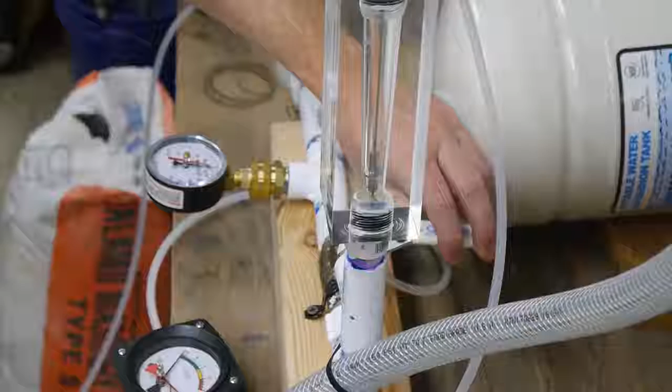You might even call this video a treat especial because it's the story of what may be one of the most inept YouTube collaborations of all time, thanks to me. It all started with a sketch of a venturi. A venturi is a device that constricts the flow of fluid to take advantage of Bernoulli's principle.

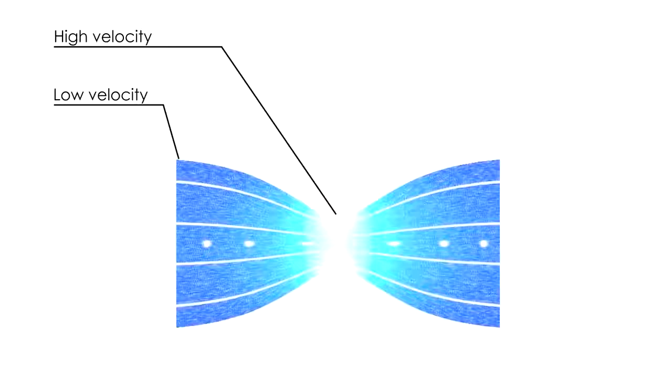You may have heard of this principle, which basically says that all energy in a fluid can take one of three forms: kinetic, potential, or internal energy. And the total amount of energy is the same along a streamline. So if you change one, for example, if you increase the kinetic energy of a fluid by speeding it up, you have to accommodate. In this example, the fluid's pressure goes down.

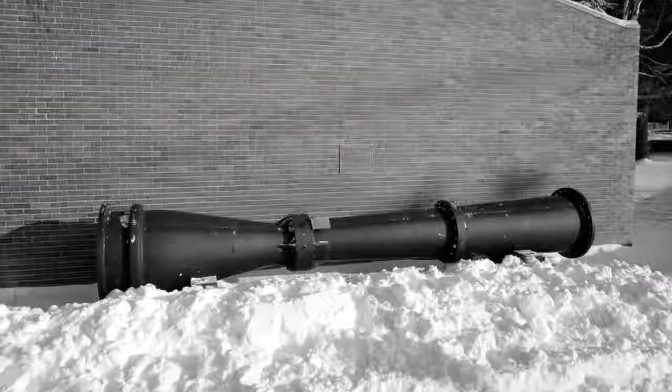Being able to lower the pressure of a fluid or create a vacuum just by constricting the flow area makes a venturi a very useful tool that can be found in all kinds of devices, from engines to trombones to scuba diving regulators. So I thought I'd like to have one of these venturis, and I know just the guy to make it for me.

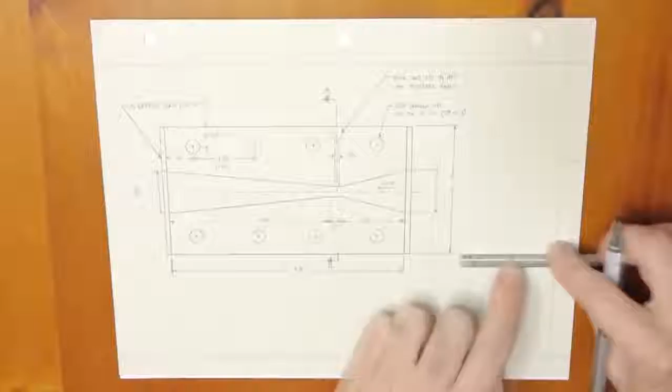You may have heard of his YouTube channel, Arduino vs. Evil, now cryptically shortened just to AvE. We've never seen his face, but we're pretty sure he's handsome. Him and I had been emailing ideas across the US-Canadian border, and this seemed perfect. I have a channel centered around practical demonstrations of engineering principles. He has a clapped-out Bridgeport milling machine. It was a match made in YouTube heaven.

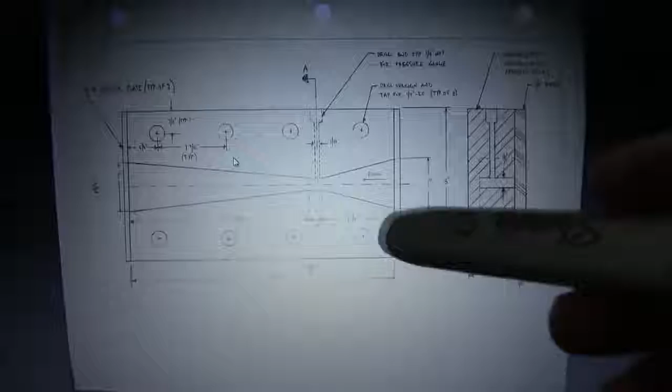So I sent the sketch over to AvE and said, "Could you make something like this?" And he said, "The drawings are never right. There's details left off. The guy doesn't know from his elbow, or whether it's drill pressed, punched or bored." But he tried to make it anyway, providing us with many excellent lessons about manual machining. Just busted out. So there's three ways to do this: the dirty way, the hard way.

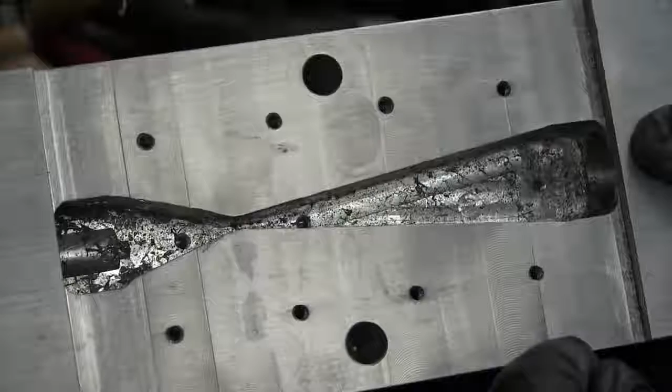And in a second video, the prototype was finished, and we were left with these parting words. If I were a betting man, and I am, I'd bet that this ain't gonna work. And it didn't. Or at least, I have to assume it didn't, because 10 months later, I got this in the mail. Instead of giving me the hard truth that my sketch was poorly considered and I wasted his weekend, he gave me something even better.

A care package including a clear acrylic liquid flow meter that was designed by someone who knew what they were doing. And if you look closely at this flow meter, you might recognize the shape as a venturi, which is perfect because I need a venturi to show you this fluid phenomenon.

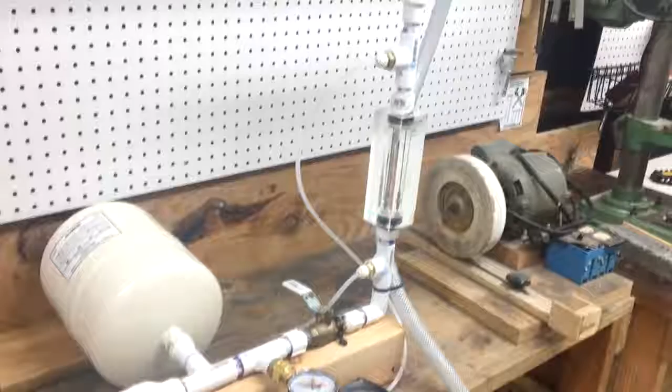Here's my setup. I have my garden hose running into the garage and a pressure boost pump feeding a manifold that connects to a pressure tank, a pressure gauge, and this flow meter. I modified the meter so it acts like a venturi by gluing the weight to the center post so it can't slide up and down.

And I have a differential pressure gauge to measure the pressure drop across the venturi. The drop in pressure is the whole purpose of this demonstration. To understand why, we need to look at the phase diagram of water. We know that water changes state based on temperature.

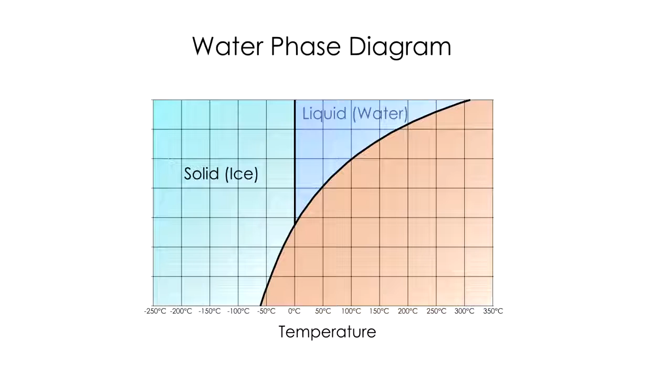It's a solid when it's cold, aka ice, a liquid at room temperature, and a gas when it's hot, aka steam. But the phase of any substance also depends on the ambient pressure. You can see that even at room temperature, water can turn to steam at very low pressures. This is true for a lot of substances.

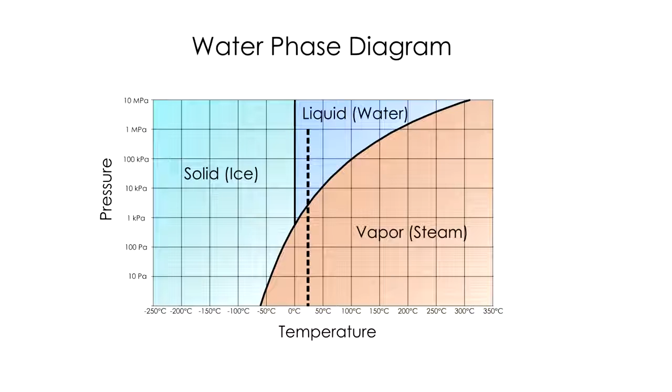If I force this water through a small enough opening in the venturi, according to Bernoulli, I'm decreasing the pressure and converting it to kinetic energy. And if I get the flow going extremely fast, I can decrease the pressure below the vapor pressure of the water, converting it to steam.

Steam on its own isn't that big of a problem, but the issue comes on the other side of the venturi, when the pressure goes back up above the vapor pressure and the steam collapses back into water. On a larger scale, this collapse can lead to steam hammer. Check out my video on steam hammer to learn more.

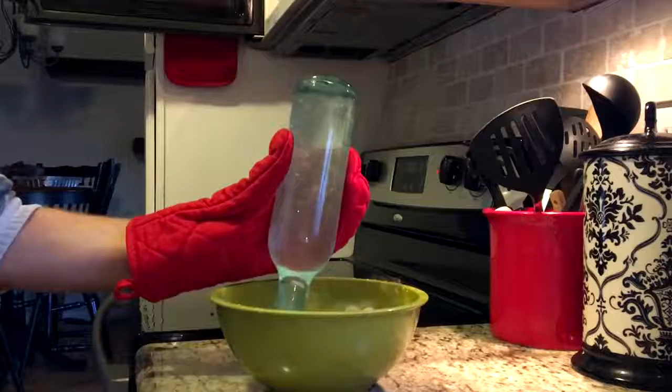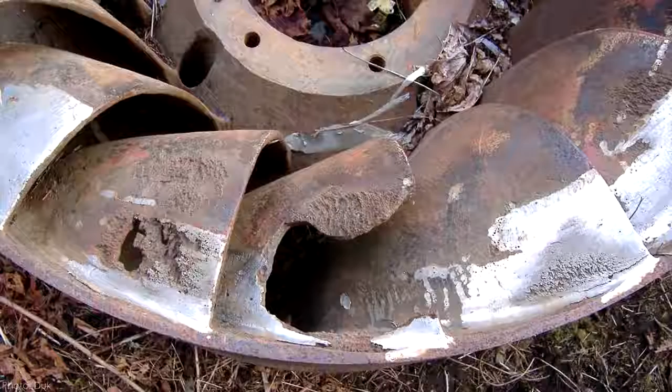But on a smaller scale, collapsing steam bubbles are called cavitation. And even though the scale is smaller, the damage cavitation can cause can be just as destructive. This is because collapsing steam causes water to accelerate and decelerate violently. Water isn't compressible, so it slams into itself, creating a shock wave. It's like 1,000 tiny water hammers.

In many cases where cavitation is occurring, you can even hear these shock waves, which sound like gravel moving through a pipe. If I build up enough pressure in this tank and open the valve to the venturi, you can clearly see and hear the cavitation occurring.

I can't measure the pressure at the constriction of the venturi, which will be a very strong vacuum, but this gauge measures the total loss in pressure caused by the turbulence and cavitation, just for reference and because it looks cool.

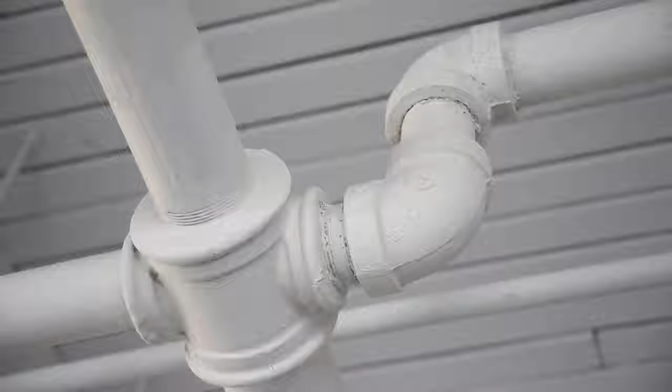Needless to say, in many cases cavitation can be bad news. It can erode pipes, impellers, and other moving parts, leading to accelerated wear or even catastrophic failure. So engineers generally avoid designs that might subject liquids to sudden changes in pressure. Pipes get smooth bends rather than abrupt changes in size or direction.

Boat propellers and pump impellers are carefully designed to match with the speed and power of the motor to which they're attached. And dam spillways are designed to avoid any protrusions into the high-velocity flow. However, although it's generally avoided in all kinds of industries, cavitation can be a force for good.

Ultrasonic cleaners use cavitation to agitate a solvent and break the strong bonds between a contaminant and a part. Some industries use cavitation to mix compounds that are difficult to combine, like paints. Finally, some shrimp can move so quickly they create a cavitation bubble to kill their prey.

As for this flow meter, it seems to be holding up fairly well so far. The acrylic seems to be able to absorb the shockwaves better than metal would. So it's probably best that our collaboration worked out the way it did.